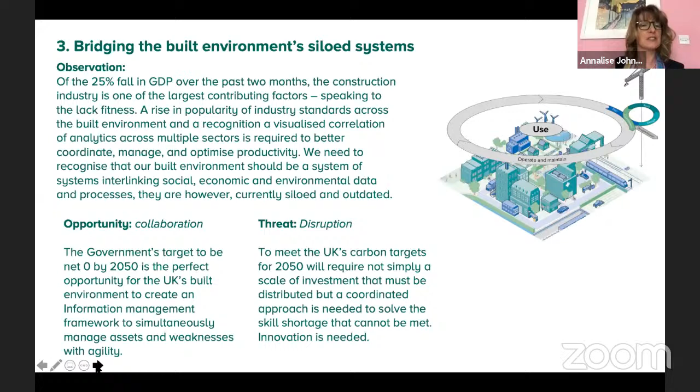It really is, we don't have the workforce, so we really need to think more innovatively about how we're going to get us there. I'd like to make a final point. This is an overview of basically where I think these opportunities are.

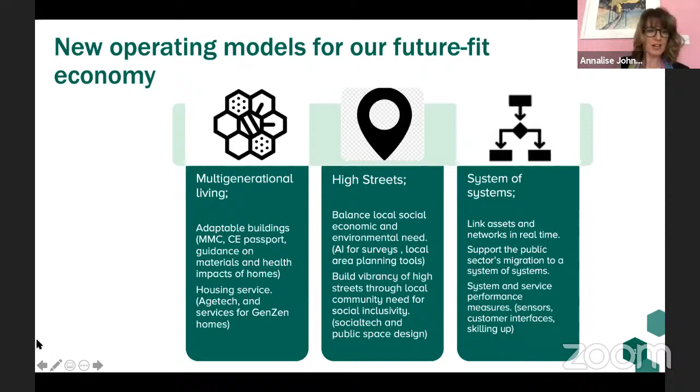As my final slide, I wanted to just review. I'm not sure if anybody's been reading Green Swans, published in April, but it reminded me that when I worked for the NHS in 2018, the strategy team really brought an importance on the sustainable development goals. They're over 20 years old now.

They've been rejigged, but they are forming the basis for the NHS, and they really have an important message for us. One thing I got from Green Swans that I didn't realize was that not only are there 17 goals and 169 targets, but they're actually being focused in 4 specific areas: food and agriculture, cities, energy and materials, and health and well-being.

So I encourage you all to not only familiarize yourself with the sustainable development goals, but to allow the targets to be the foundation of your intentions going forward, because we really need to catalyze this social, economic, and environmental model within all that we do. Thanks so much.

Thank you very much, Annalise. It's really brilliant to hear the inspiring entrance speech coming from the Catapult. It's really important for us to know the challenges and the scope of where and how we can build our industry and build houses fit for the future for the next generation as well.

I really like what you said about housing as a service. It's definitely something that is food for thought for the audience, and I really like how what you said also links up with other sectors like energy and food. So I'm just having a look at the Q&A. If anyone has any questions, please put it in the Q&A box. I haven't got any so far, but if I may, I've got a few questions for you, Annalise.

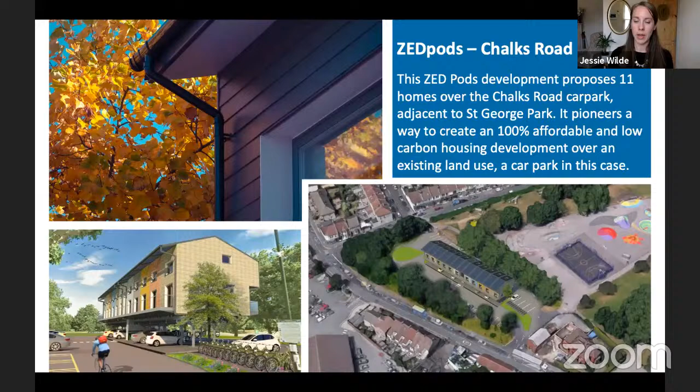In everything we do, we're looking at the story behind it. We need to start breaking down silos. When it comes to enabling innovation, we must break down the silos between politics, industry, and public. So much sits within those silos, and conversation so rarely crosses between them. We're trying to break those down and provide events and research accessible to all these groups, to both celebrate and reimagine together the future of the city.

It's a consortium of partners - lots of different partners have come together to make this bid possible, including BRE and about 9 different modular providers. It's looking to unlock the barriers to innovation specifically around MMC house building within Bristol. It's a variety of different MMC partners, from local SMEs such as Knowle West Media Centre through to large national volumetric companies such as BoKlok and L&G Modular Homes. Working with Bristol City Council, what can we learn from all these different methodologies and ways of building houses here?

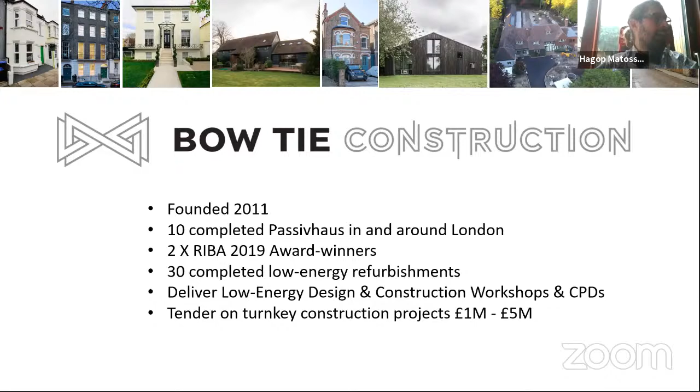We are a small business. Our annual turnover is around 5 million. We're growing 25% year on year organically. We've completed quite a lot of refurbs, and we also deliver workshops. We have a lot of architects and other construction professionals coming to visit our sites to see what we get up to and see how we solve some of the challenges that we face on site.

I'm now going to show you a bit of a video, something that we recently put together.

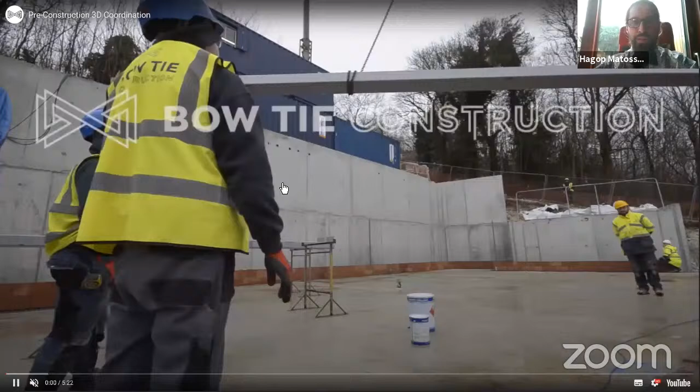In terms of innovation, we're always looking at ways to de-risk our projects and to save time on site and save stress. Because the kind of work we do is so challenging, we're often having to find value for money solutions so that the client isn't massively paying over the odds for their project.

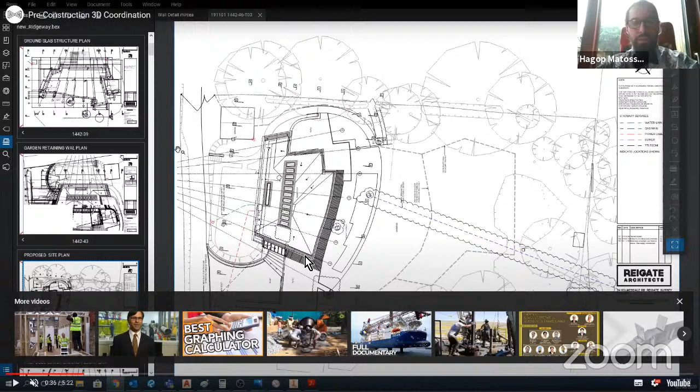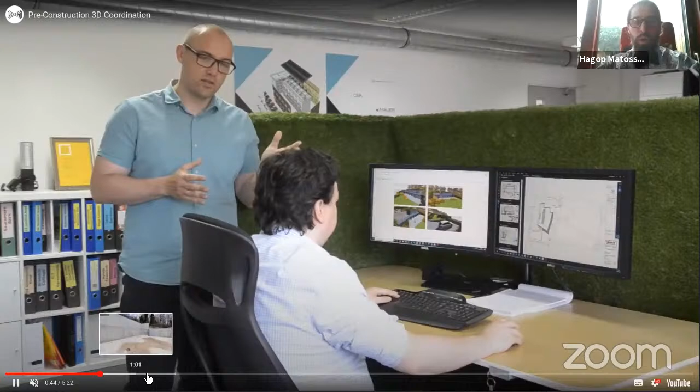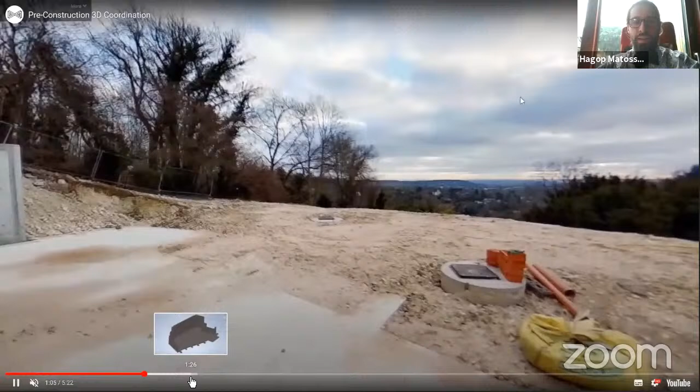Here's an example of a house where none of the walls are parallel, so the steel construction was extremely complicated. What came to us as the design for the steelworks on 20 pages in 2D, we essentially went to the site, took a laser scan of the site. This is how it was presented to us, the concrete pad that was built. We laser scanned it, then built a 3D model in Inventor, which is a very accurate 3D software.

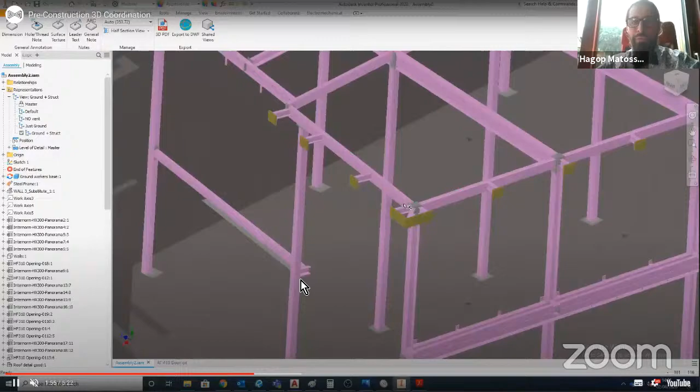We then combined all the steel drawings together into our own 3D model, which was then shared with the structural engineers, shared with the steel fabricators. Once everyone had approved it, it was then used to actually fabricate the steels.

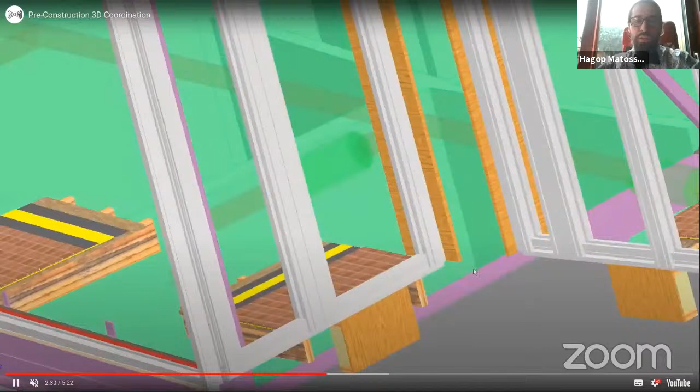Once we had this model, we built the rest of the house on top of it. This allowed us to size everything to the steel work, put in all the services connections, and also build the windows into the frame and order the windows directly from the frame, which we've never done before, and we don't think anyone else that does projects around this size does.

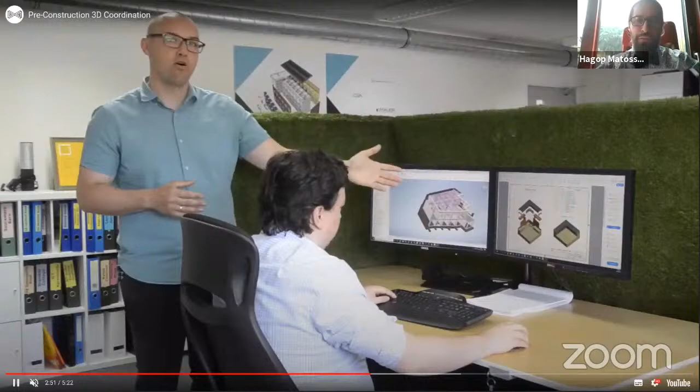But it essentially meant that everything delivered to site fit perfectly first time. There was no adjustment required, which is never planned for, and it's always an extra cost that has to be passed on to the client.

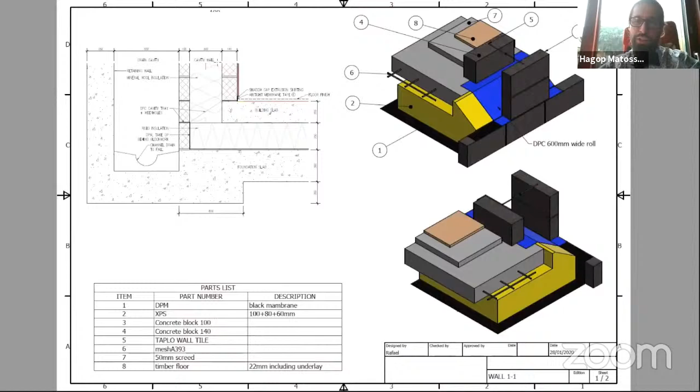This is an example of a gutter detail that we built in 3D, purely so that our builders could see exactly how it came together, rather than just looking at section drawings. Here's another foundation connection detail, again so our builders can see exactly how they go together and know exactly what they're doing. This kind of front loading the construction process with further design massively saves time on site and reduces doubt.

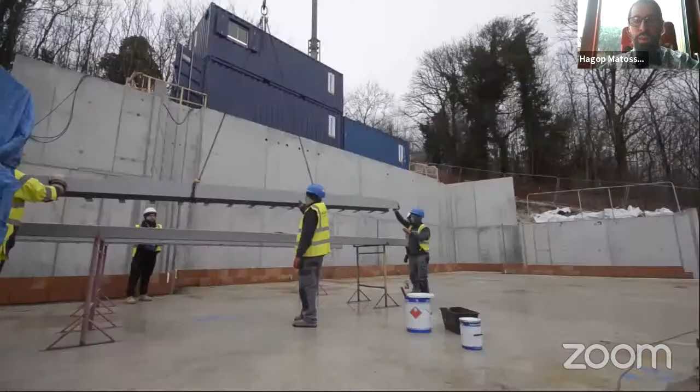We're now jumping forward to actually being on site, and the setting out engineer took that 3D model we built earlier, and with his total station he's marking out all the connection points where the steels are going to get attached to the foundation, to the concrete pad.

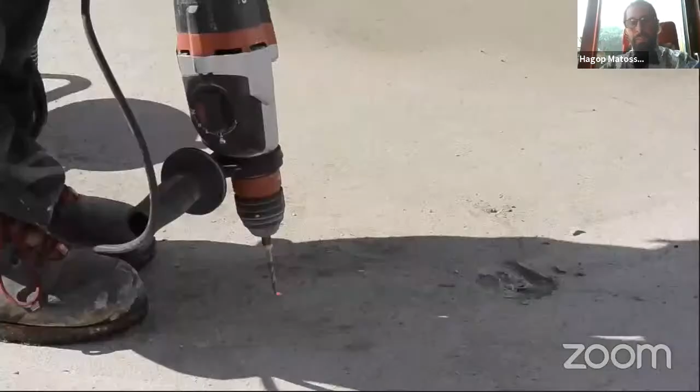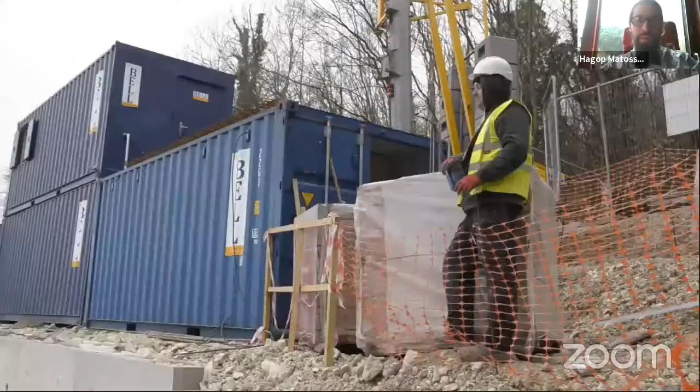We're drilling the holes before the steels are even on site. Then the steels come onto site and they're bolted exactly where they want to go. Everything fits perfectly. So we're really happy with the way this has gone with this build, and we're going to be taking this approach forward on all our comparable new build projects.

I'm now going to talk about Energiesprong. We won a research and development competition, EU funded, from Energiesprong UK, where we were given a subject building in Kensington, and we were asked to come up with a retrofit solution to take this building, a 1950s apartment block, to net zero operational carbon.

They just have an annual service plan, and typically the service plan equates to about a quarter of what they were paying previously when you added up all their bills. That amount is set by the landlord and the housing association, but that's the typical ratio.

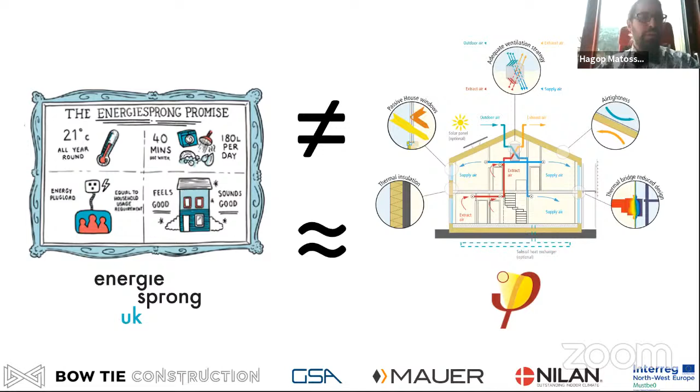The challenges with whole building retrofit are these panelized systems rarely fit precisely. They have to be adjusted on site, and that adjustment increases cost, increases the time you spend on site, and massively inconveniences the occupiers, because during these Energiesprong retrofits the occupiers stay living in their homes, they're not decanted. So the installation duration, with people trying to chop off corners of panels and make panels fit together, is something we're really trying to design out of the whole process.

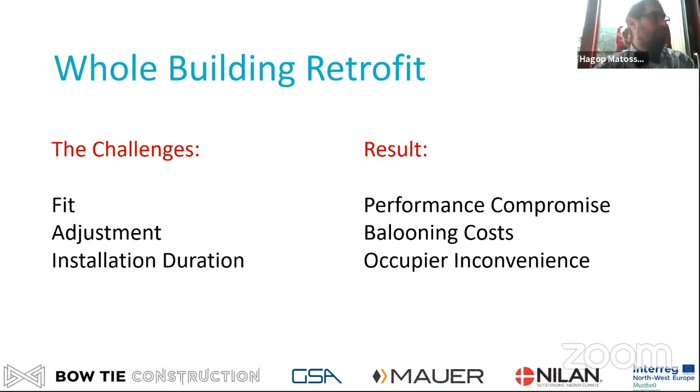So we're using a Passivhaus enhanced design to improve performance, to then reduce the amount of plant required to keep these houses warm and provide hot water. We're using that front-loaded design process to try to design out any connection issues that other panelized systems tend to have, so the installation is much faster, lower disruption, on time, and on budget.

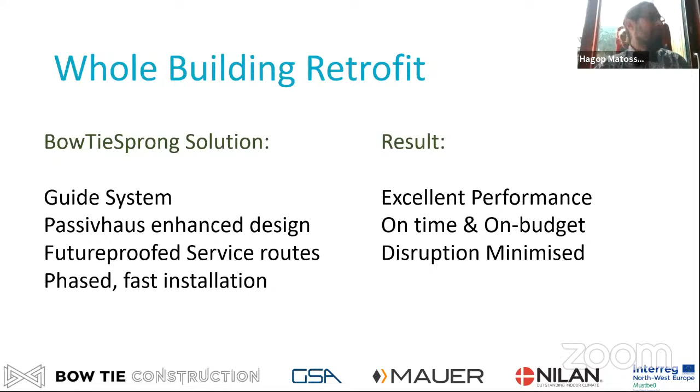As far as the actual energy performance, the performance of the building as it is now has been modeled here. This is the heat load, the amount of heat needed in kilowatt hours per meter squared per year to heat one of these flats. Currently it's around 550.

Once we have done the retrofit, that's going to drop to 40. So it's dropping to sort of 8% of what it was. This also shows you what we will get from internal heat gains, which are things like fridges, kettles, and toasters being run inside the property.

And these are the solar gains - infrared radiation that enters the properties as light and is then held inside by the efficient envelope, which is now draft proof. There's also heat recovery ventilation, which provides continuous fresh air to most rooms, but definitely every flat, and also retains the heat.

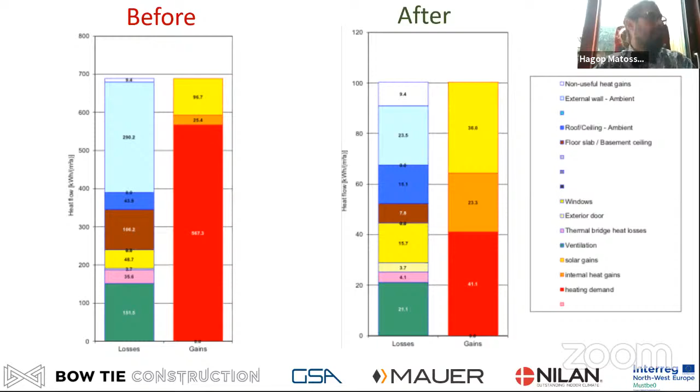We're also adding balconies, much bigger balconies. So I've got a few renders of the project that I'm going to whip through.

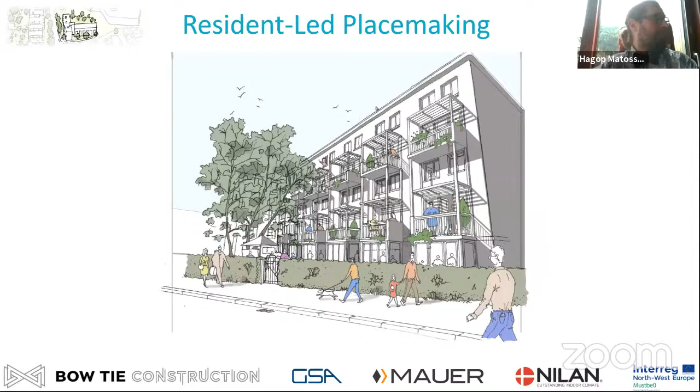What's also really important to us, and this is where I see the innovation as well, is making the residents part of this. Because if we just plonk a new high-tech energy efficient building on the residents and say, here you go, love this, they're going to say we didn't ask for this and we weren't part of this process. So part of the innovation is not just nuts and bolts and steel, it's how do you actually involve the residents in the process, and how do you make sure you're giving them a place that's nicer to live than before, not just lower bills and warmer.

I'm a permaculture designer, and I try to involve permaculture in every project I do. A big part of that is the people care - making sure residents have the ability to grow food, and maybe creating a food growing program with on-site greenhouses where we can germinate seedlings, and a group of residents who get together and do that work. Those seedlings then get distributed to the wider community to have on their balconies.

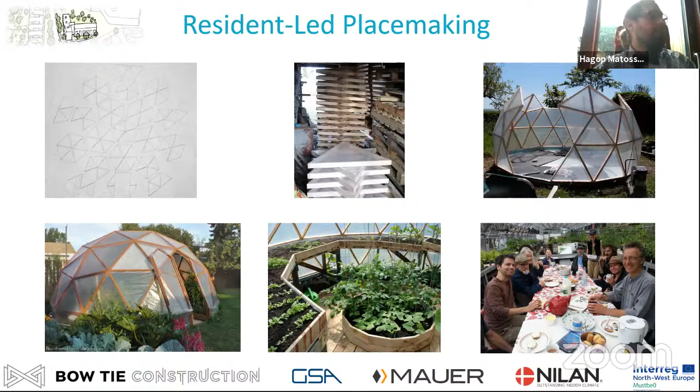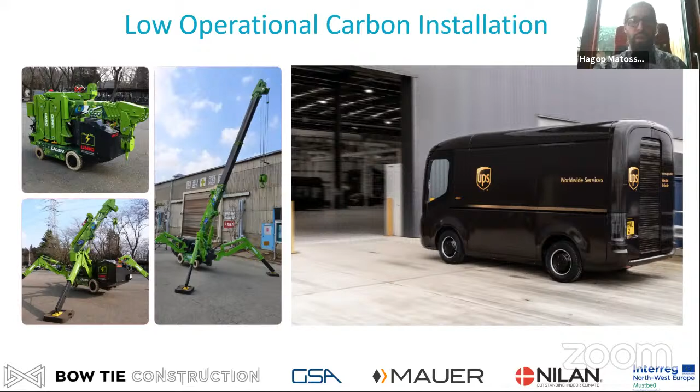We're going to make the installation as low operational carbon as possible, using electric spider cranes and electric vehicles, and last 5-mile relay stations for electric delivery into London.

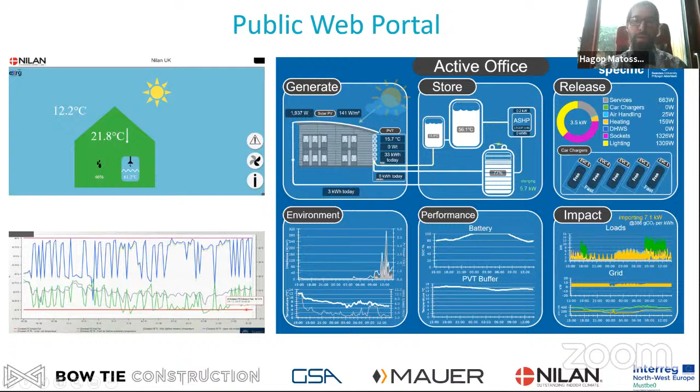We're planning on having a public web portal to display information on how the project is performing. These logos you see below: Bowtie Construction, the lead on this project, working alongside Gardner Stewart Architects, Mauer UK who will provide the wall panels, and Nilan who will provide the mechanical and electrical systems, the heating and hot water. This is a concept - we haven't been awarded the contract to build it out, but we're hoping RBKC will want to take it forward.

So thanks a lot for listening, and I'm happy to take any questions.

Thank you very much, Hagop. It's a really interesting speech and interesting to know about your business as well. Really interesting case study, especially for me - I'm interested in that Gold House. I think I've seen it before because I live near the Grenfell area in West London. It's really interesting and amazing to see the results, the drop in heat flow, and good to see your plans for expanding your product line and installation plans.

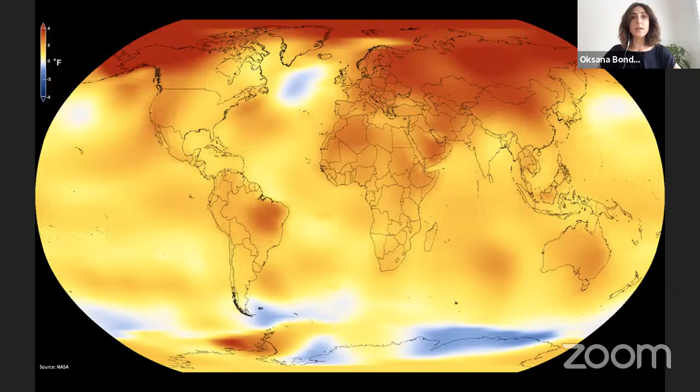The planet's long-term warming trend has caused wildfires to race through the planet and freak storms to destroy and displace our communities. We share the Earth with around 15 million species of extraordinary plants, animals, and microorganisms, and all this magnificent biodiversity is being lost due to changes in land use, unsustainable use of natural resources, climate change, and pollution. Today, about 23% of mammals and 12% of birds are considered threatened, and many are becoming extinct. Humanity is faced with a mammoth but self-inflicted problem.

At Biome, we believe there is a solution, and it's called biomimicry or biomimetics—design inspired by the way functional challenges have been solved in biology. One fine but subtle example of applied biomimetics is the Gherkin building, whose structure was configured by the very intricate but robust form of the Venus flower basket sponge. Nature has faced and resolved all challenges through centuries of evolution, and holds answers to engineering, design, and systemic problems.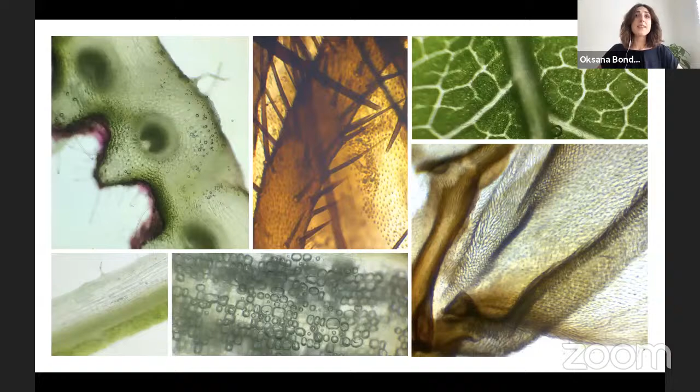If we look closer, we find that in nature the concept of waste is non-existent. All nutrients are in constant circulation, all forms are highly functional, and all organisms work with one another in symbiotic partnerships. These principles are the foundation of what is known as the circular economy.

Currently, we operate in a very linear way: we take, we make, we use, and dispose. However, when we shift towards the circular economy, this line will start to curve and move in infinite circles, allowing us to design out waste and continuously circulate all biological and technological nutrients. By doing so, we'll have a regenerative impact on the environment, society, and economy at long last.

These principles are at the core of everything that we do at Biohm. Biohm is a research and development-led company that allows nature to lead innovation, to revolutionize construction and create a healthier and more sustainable built environment. We offer a collection of bio-based materials, circular construction systems, as well as research services to the industry.

The first material I'd like you to meet today is ORB, or organic refuse biocompound. At the core of ORB, or in fact all of our materials, are local waste streams. We transform food and agricultural waste into substrates, combine it with our unique organic binder, which is made of edible ingredients that are available in abundance globally. This compound is then used to create highly functional construction materials with a variety of visual and mechanical qualities.

ORB can be used for dry cladding, interior architecture, as well as product and furniture design. At the end of its life, it can be cold composted or fed back into our manufacturing processes. Our materials allow companies we are working with to deliver on their carbon targets and achieve their sustainable development goals.

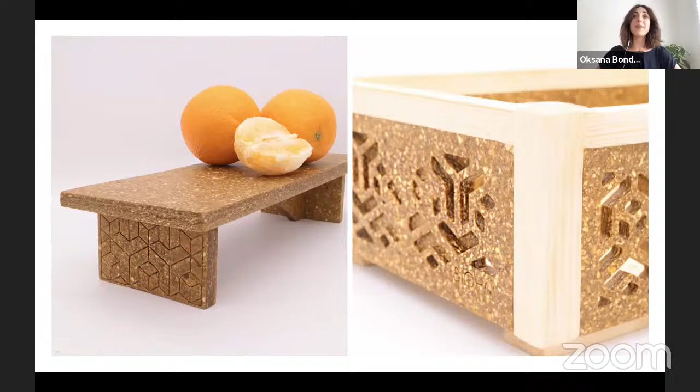For example, we are engaged with Google and Restaurant Associates. Google is very fond of their orange juice and produces 3 tons of orange peel per week, which they find very difficult to recycle due to its high acidity. So we have developed an orange peel-based ORB and designed a series of products such as risers, tiles, and fruit baskets that we return back to Google for use across their in-house restaurants.

The second material I'd like you to meet is mycelium. Mycelium is a vegetative root structure of mushrooms. The fruiting body of mushrooms is what we are all familiar with, it grows above the ground and most of us enjoy eating it. Mycelium is the hidden network that exists in the topsoil, it can be found everywhere. It's truly nature's internet, and it's the way plants communicate with one another and exchange nutrients.

As it grows, it consumes different organic substrates and binds the topsoils. At Biohm, we harness the power of mycelium to produce insulation panels. We have collected a library of fungi species and are working with over 300 of them.

Our mycelium production process is very minimal. We pick a strain, we expand it, we then introduce a substrate, in this case agricultural waste, and pack it into a mold. Mycelium insulation panels outperform conventional products, and initial tests have shown a thermal conductivity value of 0.024 W/mK.

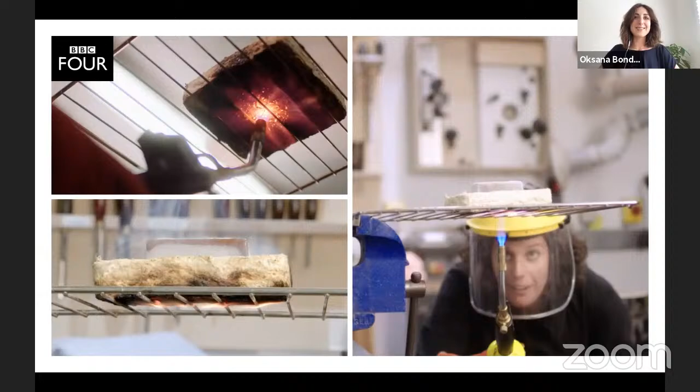Our mycelium insulation has virtually no VOCs, or volatile organic compounds. It's graded A+ when it comes to indoor air quality and can be cold composted at the end of its life, or fed back into our manufacturing processes. Yes, you heard it right, mycelium can eat mycelium.

Social sustainability is hugely important to all of us at Biohm, and we are working in collaboration with social enterprise the Onion Collective to establish the world's first community-led biomanufacturing facility in the UK, in Watchet, West Somerset. Watchet is one of the UK's most disadvantaged towns with the lowest social mobility. With this facility, we aim to regenerate the local economy by providing jobs and sharing profits with the local community. This facility will be operational from August 2020.

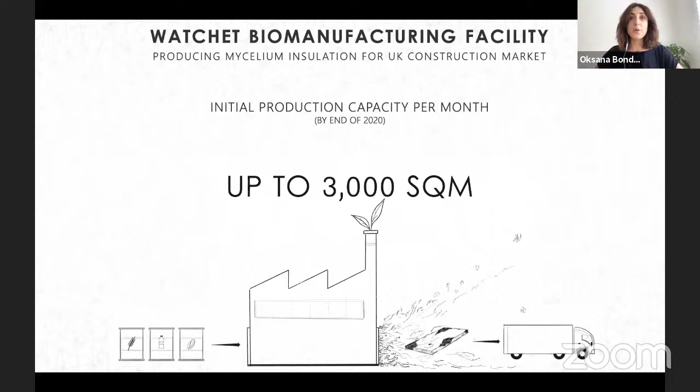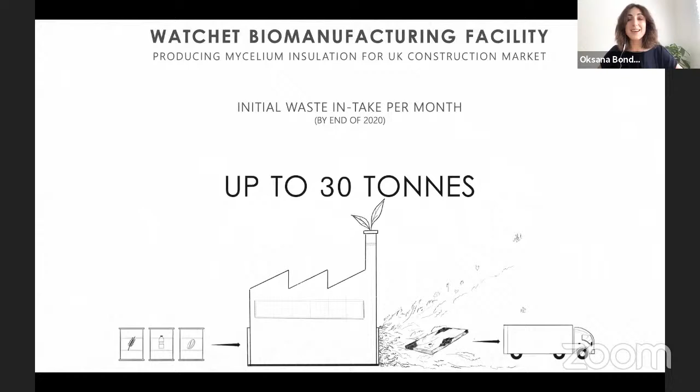To start with, it will be delivering up to 3,000 square meters of insulation. It will be utilizing up to 30 tons of waste per month and sequester up to 6 tons of carbon per month. This facility is designed to be completely closed loop. Any CO2 produced by mycelium when it grows, which is a natural process, is going to be fed through a greenhouse, turned into oxygen, and then looped back into mycelium incubation spaces.

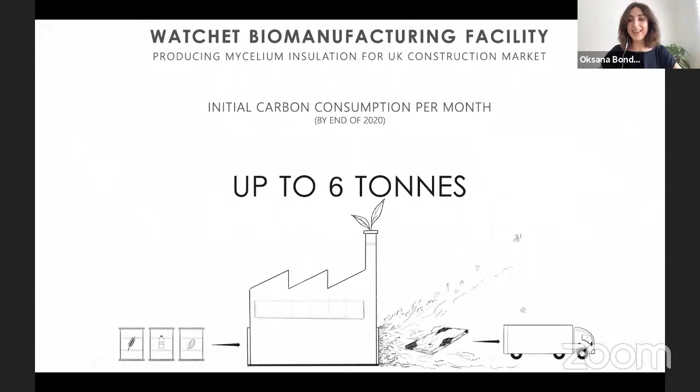Last year, we won the Plant Plastic Prize from Waitrose and Partners, which has allowed us to continue our groundbreaking development of plastic-consuming strains of mycelium. Now we have 5 strains that are capable of consuming plastics, such as PE and PU. These champion strains mycoremediate hydrocarbons within the plastics, breaking them down into simple, non-toxic carbon molecules.

Although we are achieving rapid plastic degradation rates in comparison to plastic's lifespan, our plastic-eating strains are a little slow at the moment. So we're putting these guys through a boot camp to make them faster and stronger, and eventually commercialize them, which will have global significance as it will allow us to bio-recycle plastics from construction, packaging, and fashion industries.

So watch this space. Our materials will eventually be combined to form our revolutionary construction system, Triagomy. Triagomy consists of interlocking building blocks that do not require any permanent binders or fasteners to create robust buildings. The system allows buildings to be reconfigured and deconstructed at any stage of their life, which means that your home can shrink and grow in accordance to your needs, which will allow us to start transitioning towards agile communities and cities at long last.

We are working closely with the world's largest corporations, the world's top universities, and the world's most prominent government, and of course with local communities, local resources, local businesses globally, to deliver on that dream of a biomimetic future together, the future where our industries are regenerative, our lands are nourished, waste is non-existent, our communities are prosperous, and nature is flourishing.

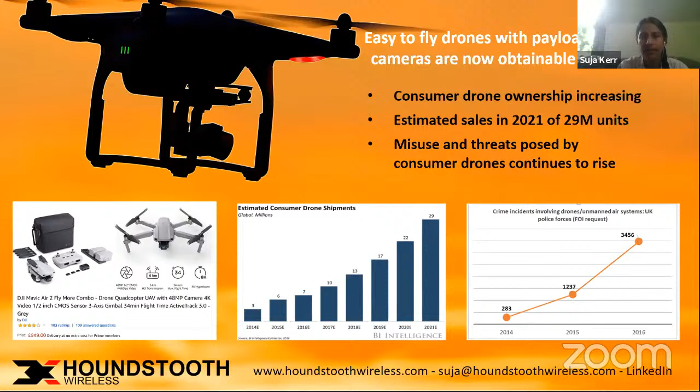So what are these threats? I've highlighted some at the top there. The threats posed by drones can be both unintentional or malicious. Unintentional threats can possibly be where a member of the public is flying a drone and loses contact with it, and it can collide with people or buildings, and also inadvertently film images of private individuals and private properties without permission.

In terms of malicious threats posed by drones, we're talking about filming again - infringement of privacy, paparazzi images, or breaches of media rights, such as filming football matches licensed to Sky Sports. At the other end of the spectrum there's smuggling and terrorism, partly due to the accessibility of consumer drones that can carry high payloads.

Often when we think about drone threats, we think about certain sectors within the built environment as being most prominent or susceptible to these risks - airports, critical national infrastructure, prisons, and high density public gatherings. You may remember the Christmas before last when Gatwick came to a standstill for several days because of a drone threat, and prisons worldwide have to deal with consumer drones being used for dropping drugs, weapons, or even mobile phones over prison fences.

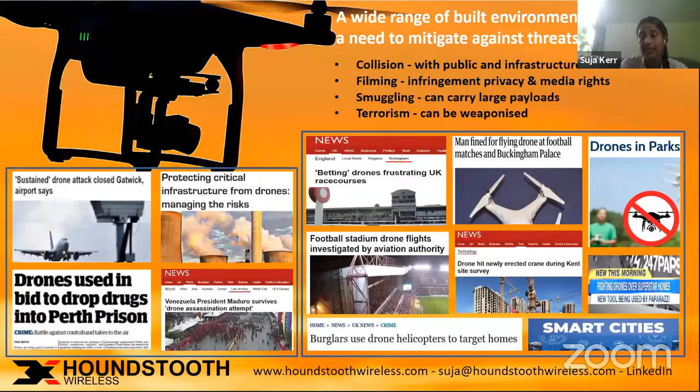So what we have is a solution that detects, identifies and tracks both drones and controllers. Our proposition from the very beginning in terms of the design stage has been for that solution to be straightforward, accessible and affordable, very much like CCTV cameras. Anywhere you might consider installing a CCTV camera as a security feature, our drone detection solution would be a no-brainer — comparably easy and simple to install. Our aim as a company is to bring drone detection to a wider range of end users, regardless of their budget, so even those sectors with modest budgets would have access to the solution.

In terms of how it works: if we have a site that needs to be protected — a residential area, a construction site, a park, or a public space with an no-fly zone installed — we would have a series of networked nodes around the perimeter. The number of nodes can vary from one to many, depending on the topology and characteristics of the site. I'd be delighted to engage with any interested parties to talk about specific site needs.

Each of these nodes would listen out for and scan for radio frequency signals sent by controllers or drones. When they detect a signal, they alert the staff on the ground, currently in the form of emails and SMS messages, though we're also working towards an app. The alert would say that a detection has happened, state what the threat type is — the model and make of the drone — and where it's been detected, so that staff can go and address that threat.

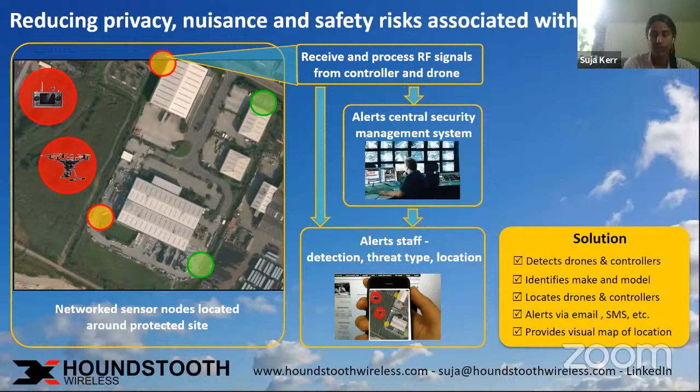I just want to pick out a few unique features of our solution. The first is the low footprint — low size, weight and power, working with power over Ethernet. This is particularly attractive if we look at the built environment sector in the long term, towards future and smart cities. Our sensors could form one of the network nodes in smart city projects, alongside, say, a temperature or pollution sensor node. This cost-effective element means that as the number of nodes increases, it doesn't necessarily inhibit or prohibit the project from going ahead due to rising costs.

Our system's been designed to be flexible in terms of power and communication options, so it could be set up as part of a fixed installation, or as a mobile deployable solution, since it can run off a car battery, for example. It's designed to integrate into existing security systems, but it can also operate standalone with its own server.

In terms of our intellectual property, the innovation is very much in the software and the algorithms. We've been very lucky to be awarded one of the T-TRIG Innovation Awards from the Department for Transport, which we're currently in receipt of. We're using machine learning algorithms to create threat libraries that are AI-enabled. This is about bringing the cost of the system down in the long term, so that threat libraries don't have to be manually updated, because the AI-enabled system is able to self-learn.

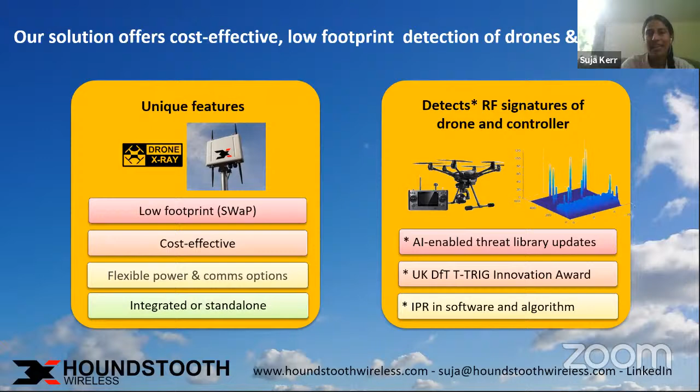Just to finish off, if you're interested at all or have a need for it, it might be because of the cost effective elements, or it might be to do with the low footprint. We'd be delighted to hear from you. Really, it's about connecting with the built environment sector so we can discuss what you need, what the needs are, and what use cases there might be, and start on that journey to explore potential pilot sites and demonstration opportunities where we can install our solutions on your site. We would gain from that as a learning opportunity, and the site would benefit from having our solution.

I think Annalise and Jessie talked earlier about this idea of not working in silos. It would be an amazing opportunity to contribute to the design, delivery and servicing of built environments, so we can think about drone detection and security as part of all these different stages, rather than as a separate silo.

In terms of engaging with us, you'd have an opportunity to get to know our technology, but also to get to know the engineers behind the company, which was set up two and a half years ago. There's Stephen and Will, who do a lot of the technical work, so they have considerable experience with software, hardware, and in defense systems as well.